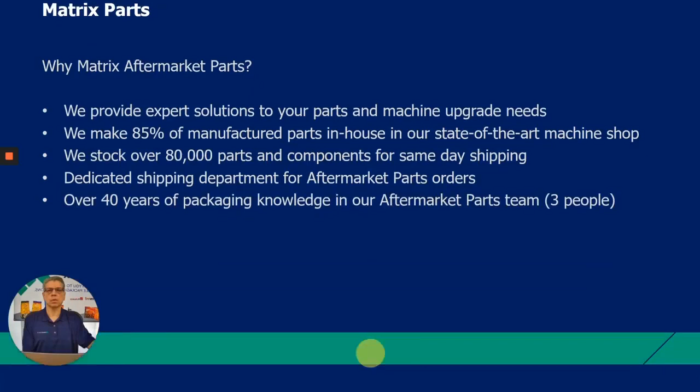How do you order the parts? There's a bunch of different ways to do it. You call us, call direct, hit number 2 and it calls everybody, or call each one of us directly - we all have direct lines. There are a couple different ways to email us and reach everybody, or go right to our website and contact us through that. So there's plenty of different ways to get a hold of us if you need to order parts.

Some helpful tips for when you're ordering parts: make sure you know the machine serial number when you call. That's very, very helpful. Some of our customers have 40 machines, and some of them are different models, so we want to make sure we get you the right parts. Know the make or model and the serial number of the machine, and the company name and your name is also helpful when you call up.

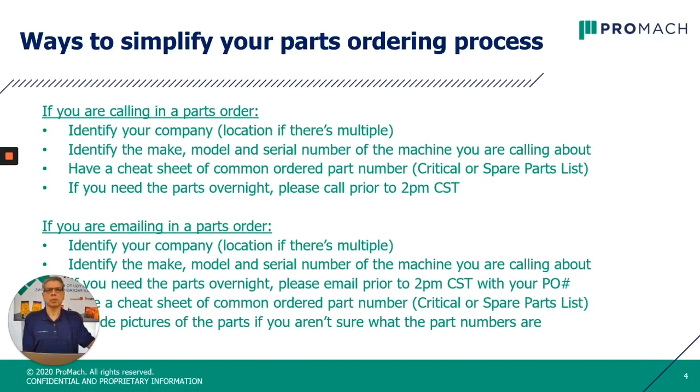Having a cheat sheet for the common parts is really helpful. There's different ways to do that. In your parts manual, there's a basic spare parts list. It looks like this, and it has your knives and belts and different things on there, deflator pads - this is your basic spare parts list. This is really helpful, and it will get you most of your consumable parts.

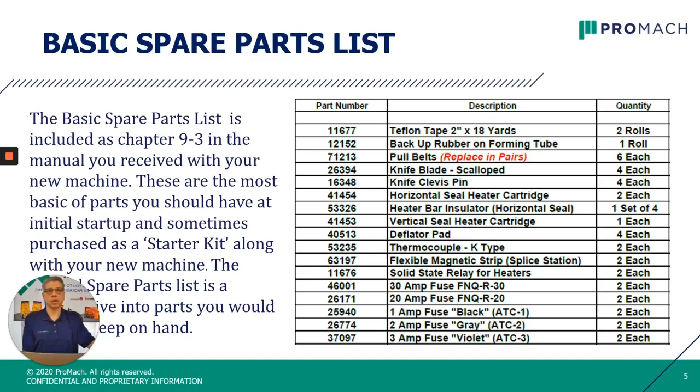In your manual, there's plenty of other things too, the actual parts drawings and things that will also help out. But if you want something more extensive, I can put together a critical spare parts list, and the critical spare parts list has 3 different levels to it. The first level is basically a more in-depth version of your basic spare parts list. I just add a bunch of parts that I realize customers might need more frequently. So I add these things on, and they're more specific to your machine. It's an extended basic spare parts list, and these are all recommended to keep in stock at all times.

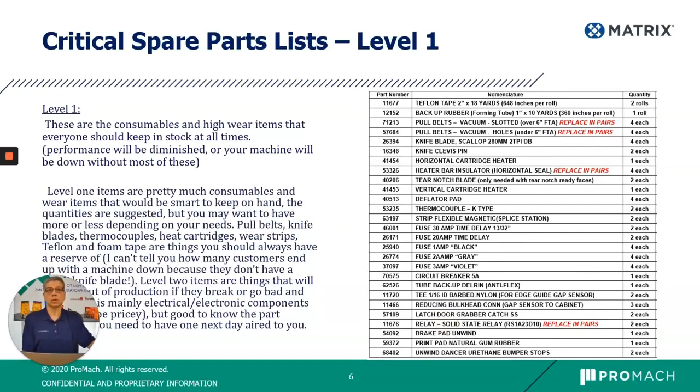As we move forward, we've got level 2 and 3. Level 2 are parts that, if something were to go wrong or you needed one of these, your machine's going to be down until you get one of these things. So it's really important to at least know the part numbers, and this gives you a real quick resource to find those part numbers and have them on hand. Level 3 parts are more electronics - touch screens, PLCs, stepper motors, things like that. If you have a newer machine, many of these things might not be something you need to keep on hand, but if your machine's 10, 20 years old, maybe you want to have one of these on hand.

Horizontal rebuild items - I put this together because every couple of years at least, depending on how often you run this machine - if you run it 3 shifts, maybe every year - some of the bushings and things like this might need to be replaced or looked at on your horizontal seal. I put them all together in one list, so if you need to order these, you already know all these part numbers. It's really easy to find them.

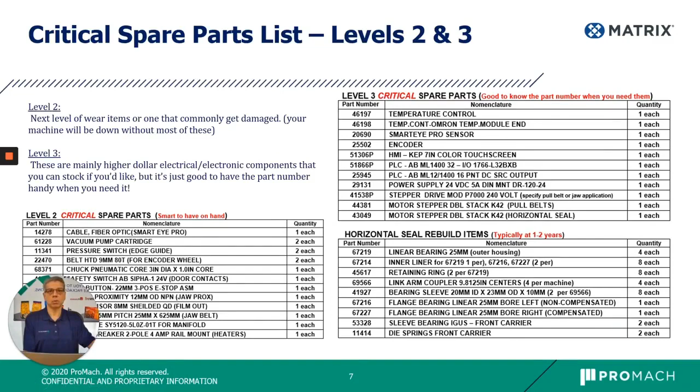If for some reason the descriptions are a little bit more confusing for your operators, I can put together a critical spare parts list with pictures, so they don't need to be able to read this or understand the terminology - they can just say, I need one of these, that's all they have to do. This actually makes it a lot easier than having a bilingual or multiple language critical spare parts list, because that can be pretty daunting getting it in 5 different languages. So a picture's worth 1,000 words, and I find this to be very helpful for a lot of customers and operators.

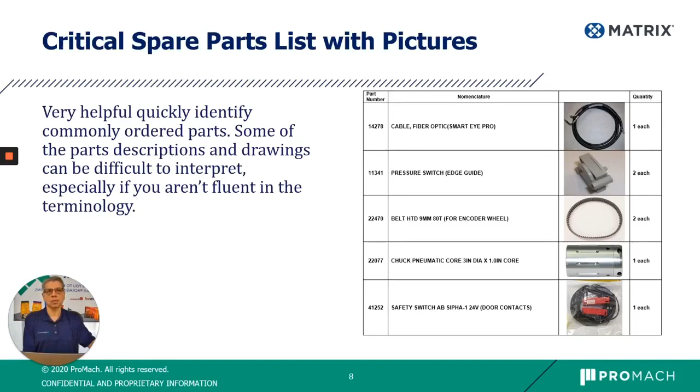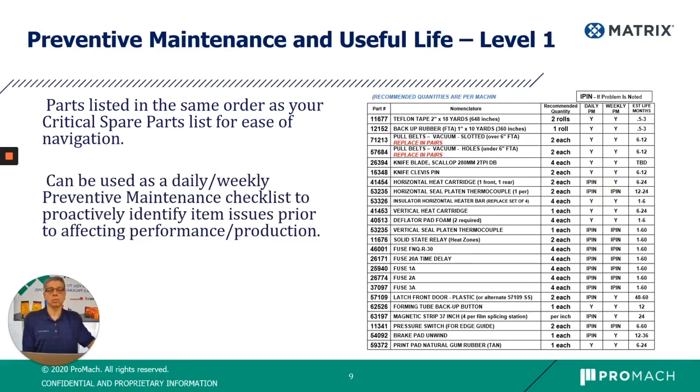On top of the critical spare parts list, I started making these. Off to the side, I've put in what I'd recommend for your daily maintenance, things you want to check every day, every week, and then what is the useful life of this part, what do I expect it to last. This is helpful if you want to go ahead and stock some of these items. If I might need it in the next couple of years, maybe I want to have one on hand. I might need more if it's a consumable item needed every few months.

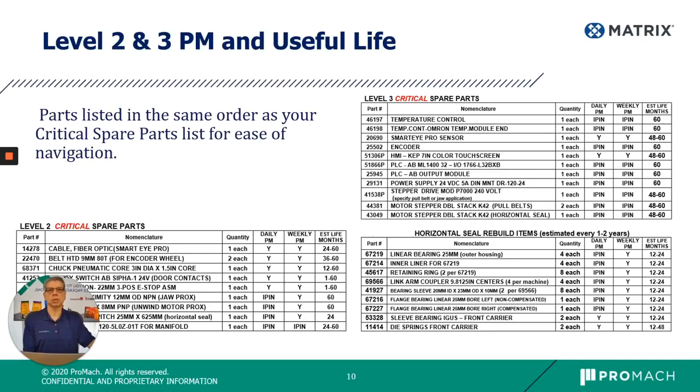This is the same thing, going line for line in the same order as your critical spare parts list, so it's really easy to navigate. Of course, if anyone has any suggestions on making it easier to read, let me know. I'm always open for suggestions.

One of the ways I find to help people save tons of money on ordering parts is getting all your parts in one lump instead of ordering them one at a time. I have customers that sometimes email or call us one to three times a day, ordering separate parts, separate items, separate shipping charges. On average, customers will call once a week, once every couple weeks. If you've had your machine for a while, it's easy for me to say, well, every 3 months you order these exact same parts, same quantities.

What I do is put these into a kit, and you'll go ahead and order that kit of all the parts you normally buy. You're not buying anything different, nothing at all. You're just going to be getting them all at once. You can always call us if you need something else, to order something else, but you'll have all these parts on hand.

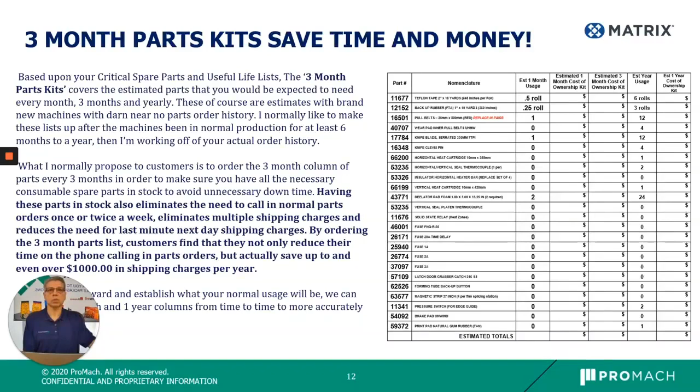Downtime costs more than anything, and this reduces it. It also reduces thousands of dollars in shipping charges, next day shipping charges, and you being on the phone having to call us. You got other things to do. This saves you calling us twice a week or whatever, and you can spend that time doing something else.

Now, retrofits and machine upgrades. There's plenty of retrofits and upgrades to our machines that can possibly go into them all now. What I want to do is cover one of our newest and most exciting ones, how to make a really great looking Doy-style stand-up pouch on a vertical form fill machine.

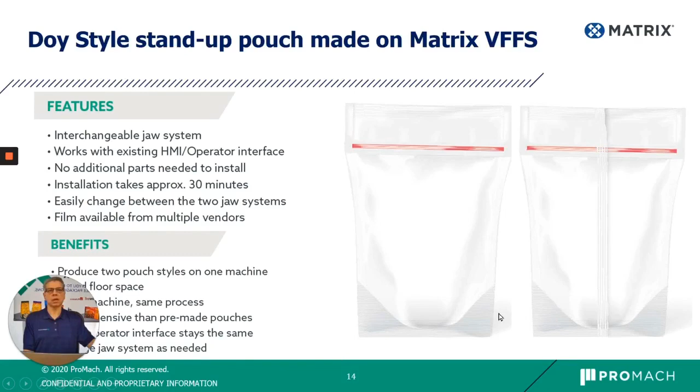Customers are always asking, what kind of bags can I make? Well, you can make a flat bottom bag, a gusseted bag, or a certain Doy-style bag. This particular one has gussets at the bottom. This right here is an excellent looking Doy bag. You can make it without a zipper too.

These are actual pictures of a customer's bag. This customer wanted their zipper down a little lower; they would have had graphics on the bag, you would have seen it anyways. But you can have this with or without zipper, though typically the zipper's a little higher. Take a look at the bottom of the bag, look at the structure of this. Literally, this looks like a Doy bag.

This opens up avenues for certain customers that you never were able to help out before. If you want more information on this, I've got videos, links, all kinds of information, more than I can present here. Get a hold of me and I'll send you more information on this.

This is a certain film that about 4 or 5 different manufacturers go ahead and make, so it's not a problem getting the film to make this.

Another thing our customers are really interested in is a way to transport the film without having their operators potentially injure their backs. Besides machine downtime, you've got operator downtime.

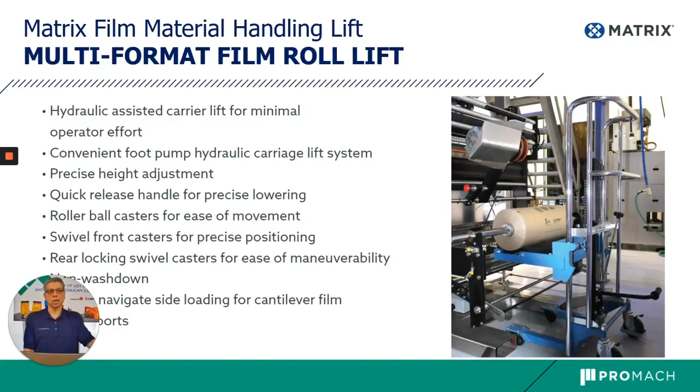This lift cart that we've designed, we spent years and years finding the right solution for our customers. This fits all our machines. It swivels on a dime, lifts up to 800 pounds, and it's excellent. And it doesn't break the bank either. It's really a great deal.

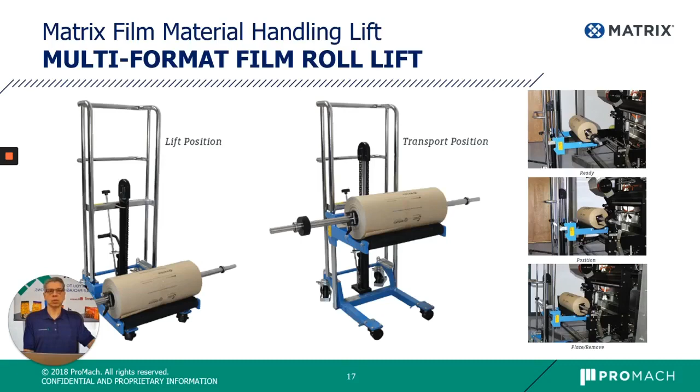I have more information on this, videos on this. Definitely give me a call if you have any questions, and I can send it over to you.